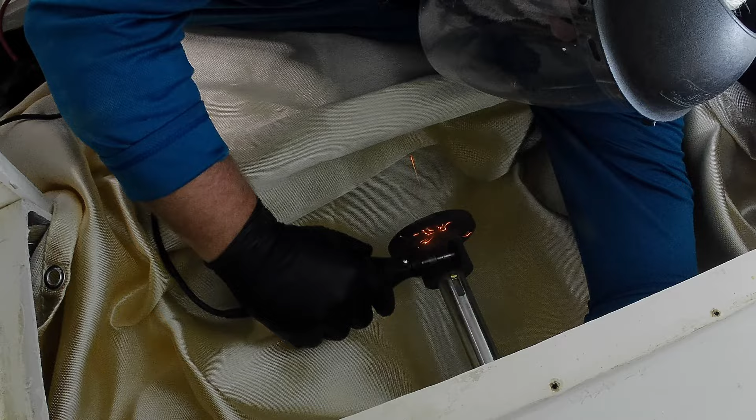I'm gonna cut down right into the coupling right there at the key so I don't touch the shaft. And once I get close enough, hopefully hit it with a cold chisel, it'll open this thing up and we'll be able to slide it off of the shaft. So why am I doing this?

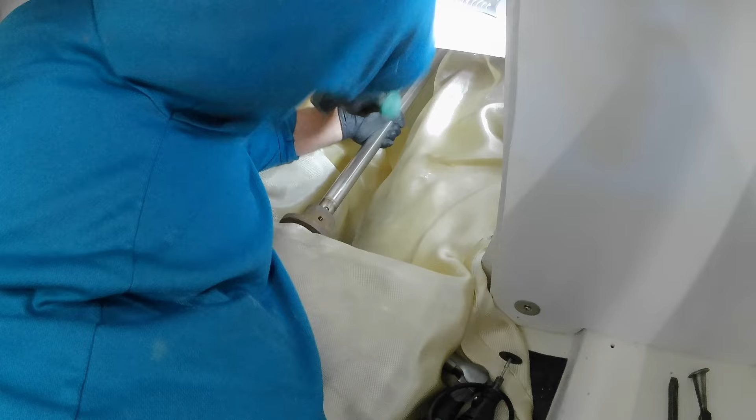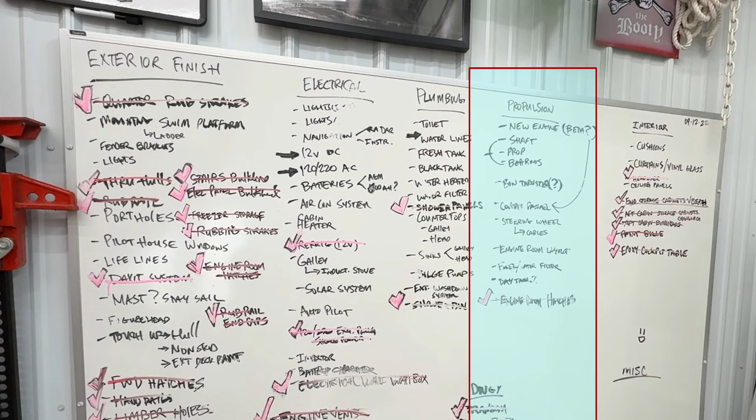For the past several months, I've been working on planning and working through the various issues related to putting in the electrical system in the pocket trawler. Now I'm going to set that aside. There's a couple things I need to start thinking about insofar as putting in the new diesel engine into the boat. In a previous episode, I talked about my choice of a Beta Marine 43 diesel engine. That'll be what I use to repower the Ep125.

Repowering is a term that I use to refer to any work that has to go on the engine and the engine room of any boat that I'm working on. The salty dogs will tell you that in order to repower a boat, well, you have to actually replace the engine or put in a new engine. But I don't really think that's applicable.

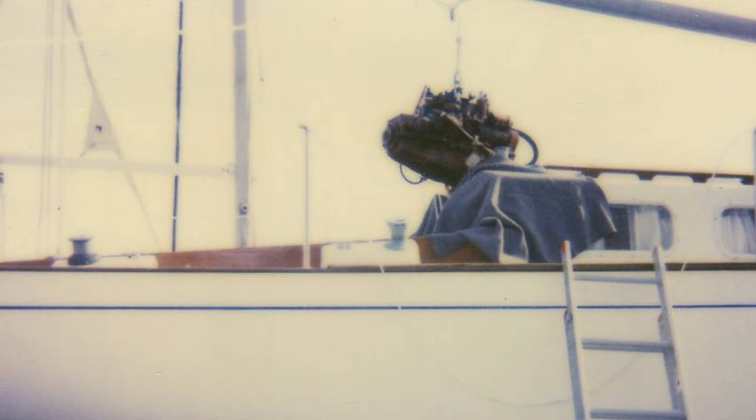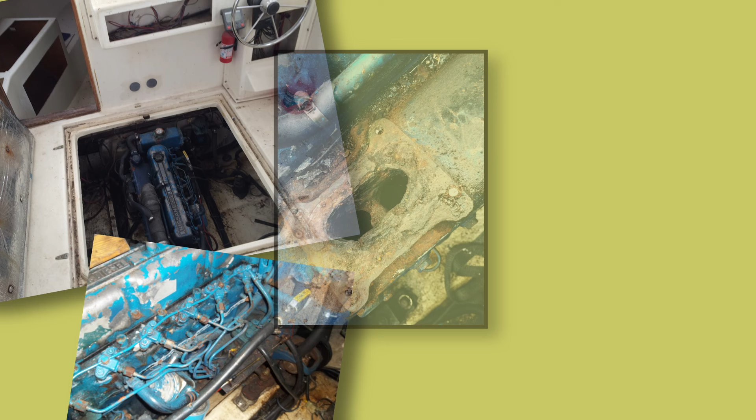If you think about it, any time that you pull out an engine, maybe to rebuild it or to swap it out with something else, or even to update the systems and components that are inside your engine compartment, as long as you're taking that engine out and you're putting something else back in, well, you're probably doing some sort of a repower. You might be refitting or rebuilding or restoring what's already there, or in my case, putting in something completely new with all new systems. This is what we call a repowering.

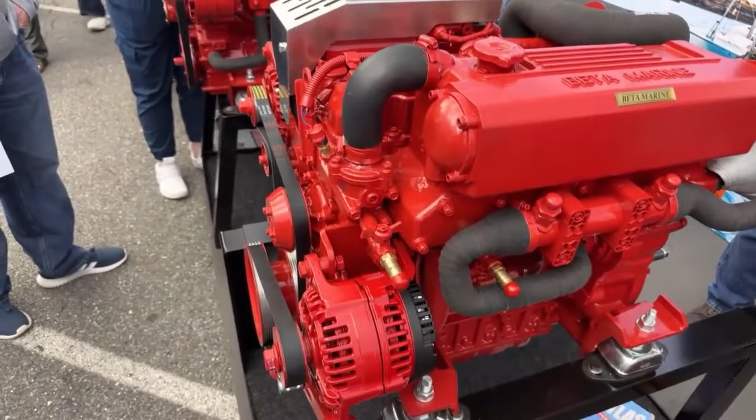This episode is going to be all about the first steps in beginning that repower process. What comes first? How do you even get a project like this started? One of the first steps in any repower is figuring out, well, what's going to fit inside the engine room? How much horsepower do you need so that it matches the boat and the performance that you want to get out of it? And later on, more importantly, how is the engine going to align to the shaft and the other components that are already in place?

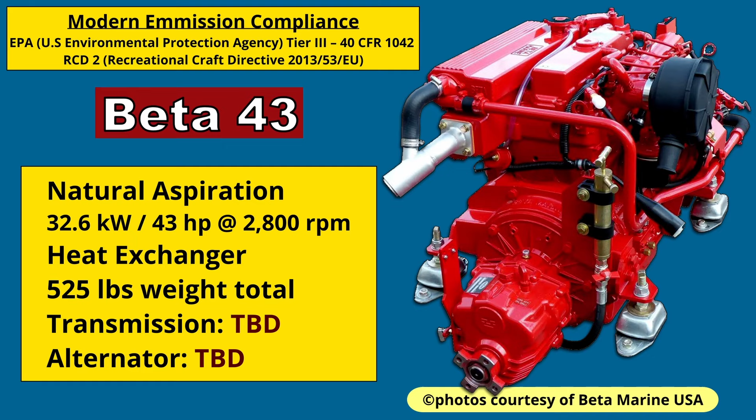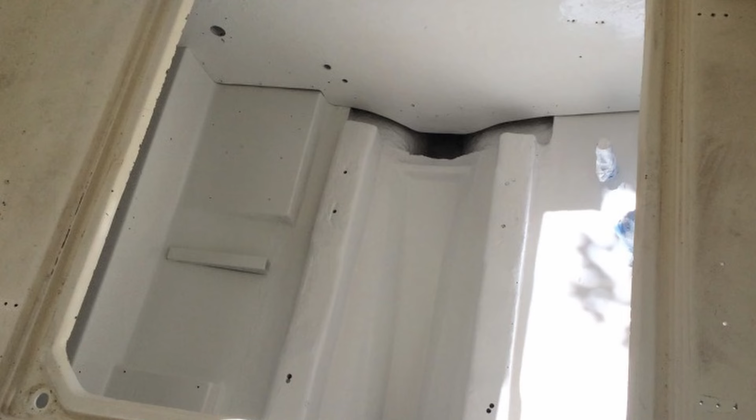So I've decided on the Beta 43, and I guess my next question is, how do we get started? What's the first step to get this thing installed? Yeah, so once we've chosen a model and once we figured out the best fit for your application, then we just need to make sure what your engine bed looks like. If you really think of it from a very simplistic standpoint, our engine is really only going to touch your boat in 5 points. You got your shaft coupling, which normally isn't going to change, so that location would be a good reference point. And then you've obviously got the 4 engine mounts that will attach to your stringers.

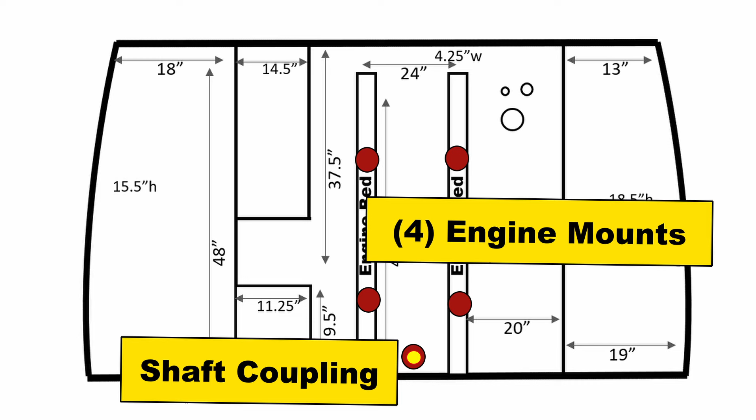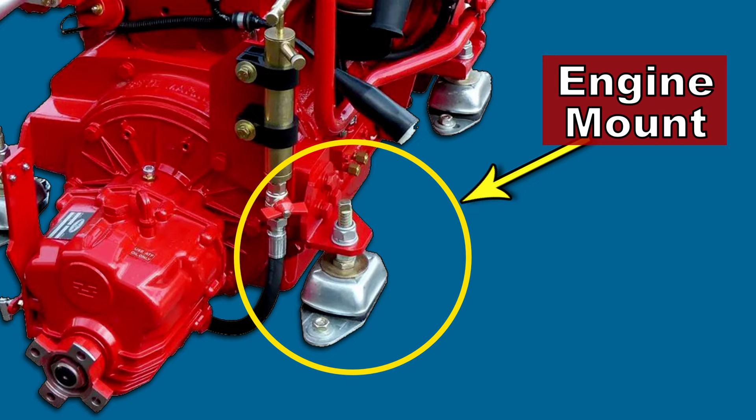So really, once we know the reference between the shaft coupling and the engine beds, that will give us an idea of, we have a variety of off-the-shelf mounts, and in some cases we can do custom mounts if necessary. All right, thanks so much, Keith. I appreciate it. I'll get back to you with some of the measurements, and we'll see where to go from there. Sounds good.

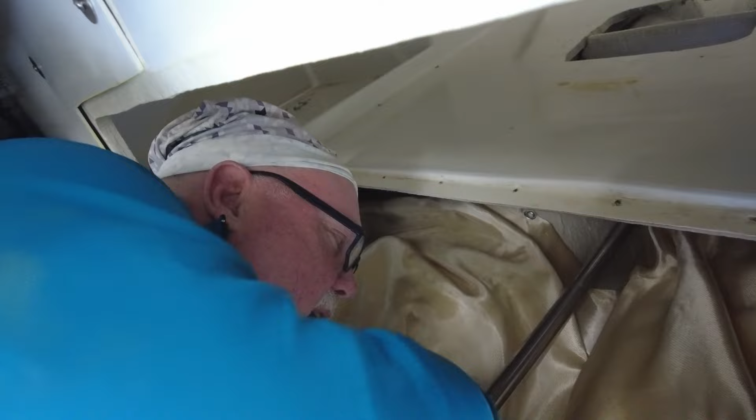I feel like I spend a good portion of my life with this boat upside down, crammed into tiny spaces. I'm down in the engine hold here, and I'm going to be working on getting the coupler off of the engine shaft. Let me see if I can show you this here. Let me get a pointer here. All right, take a look. This is the shaft, right? It comes from the stern of the boat, comes up here. This is a coupling, it's on here. Can you see that? It's a coupling.

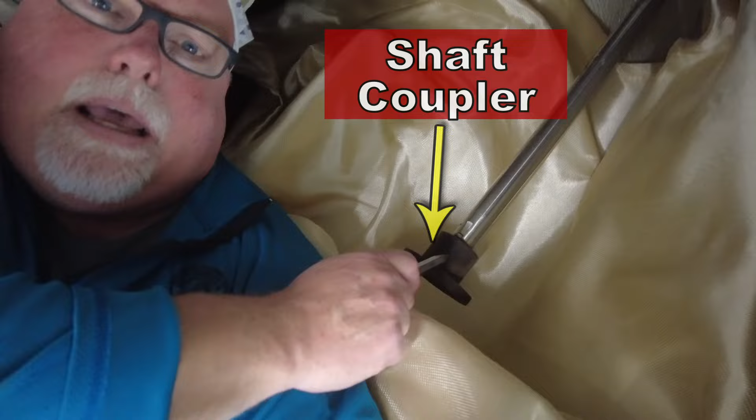And what I'm gonna do is I'm gonna cut this very, very carefully right along here, right where the key is. There's a key that goes inside there, and that's what kind of locks it in place. Well, I'm going to cut down right into the coupling right there at the key so I don't touch the shaft. And once I get close enough, hopefully hit it with a cold chisel, it'll open this thing up. We'll be able to slide it off of the shaft. So why am I doing this? I can't take the measurements I need to take.

I can't extrapolate out where the shaft is going to be relative to the engine beds until I get this coupling off of here. Then I'll be able to lay something against the shaft, kind of extrapolate out where it goes. That'll tell me how much has to come off of the engine bed. So before I get anywhere down the road, I've got to get this coupling off.

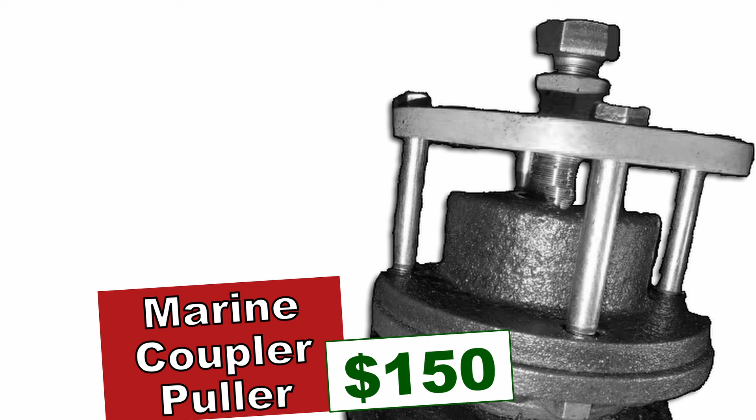Trust me, I debated trying to use a tool to get this off. I broke my gear puller already trying to pull this off of here. It didn't work. There is a special tool that you use for this. It's called like a flange pulling tool. But I don't have one, and the one they make for marine applications is $150. You got to order it from a shop, and I don't have that.

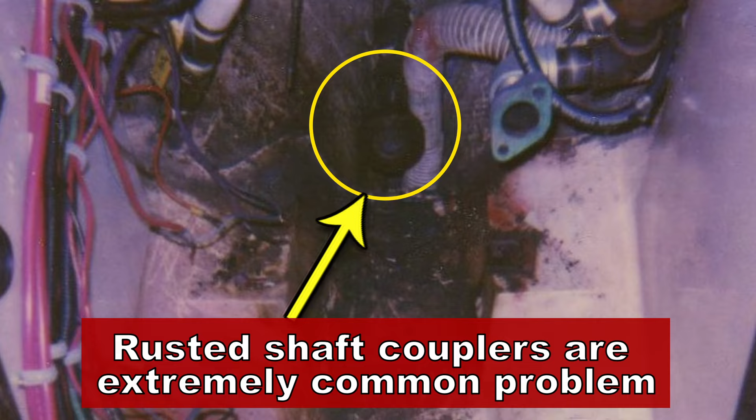And to be honest with you, the last time I did this type of project, when I was doing some of the work on my classic Alberg 30 sailboat, well, I cut the flange off that shaft also, because from my experience, once they get rusted like this, it's virtually almost impossible to get them off of there, no matter how much heat you apply, no matter how much penetrating oil you apply, no matter how much you use a puller and work on them, it can be extremely difficult to get them off and take a lot of time and effort. So I'm going to try and cut it off.

And to do that, I've got a handy rotary tool. And this particular one, I'll show you, it's got these special reinforced cutting discs that you use. They're fiberglass reinforced, and hopefully this will work, cutting through here. The key is you got to be very careful not to damage the stainless steel shaft, because this shaft is probably 8 feet long. They're very expensive. It's 1.25 inches in diameter. I'm gonna work on this. We'll see if we can get this off of here.

You can see I've laid down, this material here is actually a welding blanket to kind of catch the sparks that may come off of this as I'm working here. And I'll just kind of take my time, and we'll see what we can accomplish doing this. We'll know right away whether this is gonna work or not.

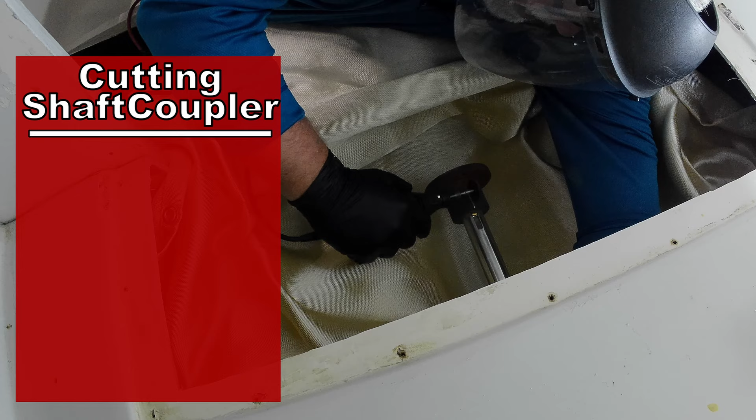If you're doing a boat restoration and your boat has an inboard engine, if you're doing any sort of repower, chances are you're going to end up having to do this sort of project. Sometime you're going to have to get that coupler off. There's a couple things you got to know. The first one might seem kind of obvious. You need to be able to see what you're doing. Often it's really difficult to get inside the engine compartment, get up close, see what's going on. Don't make the mistake of trying to do this at arm's length when you can't see what's happening up close.

Second thing is you really got to take your time. You really got to stop and take a moment to check what you're doing before you continue on. You got to be very cautious when you're doing this. Otherwise, you'll end up ruining your shaft and costing yourself a lot of money and headache. On my classic sailboat, I actually damaged the shaft when I was removing the coupler back in the day. I was lucky that it was only about 3 feet long, and it cost me several hundred dollars to get it replaced. You can only imagine what an 8-foot shaft would cost you.

Just like any kind of metal work, there's going to be a lot of debris that comes off of this while you're trying to cut it. You've got to have PPE to make sure that you don't take a piece of metal in the eye or up your nose. It might seem tempting, but this is not a project for your grinder. The grinder's just too big and it puts off too many sparks and it's just uncontrollable. You really need something like this rotary tool to be able to really control what's going on.

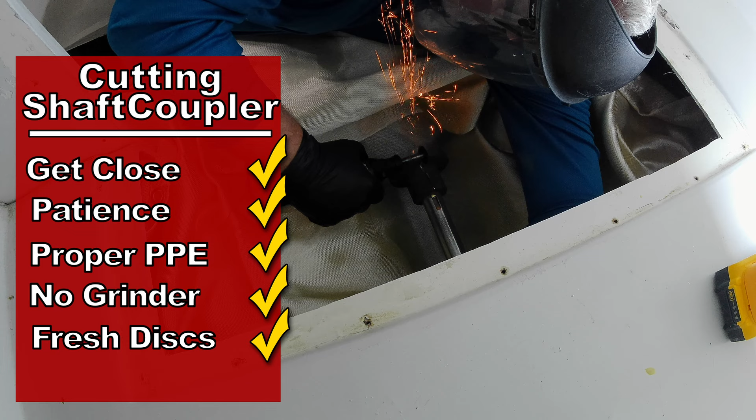Have lots of spare cutting discs available. I think on this project I went through 4 or 5 discs before I finally got everything cut open. Cut only at the keyway, using the key as a sacrificial kind of piece. That way you won't risk cutting down into the shaft.

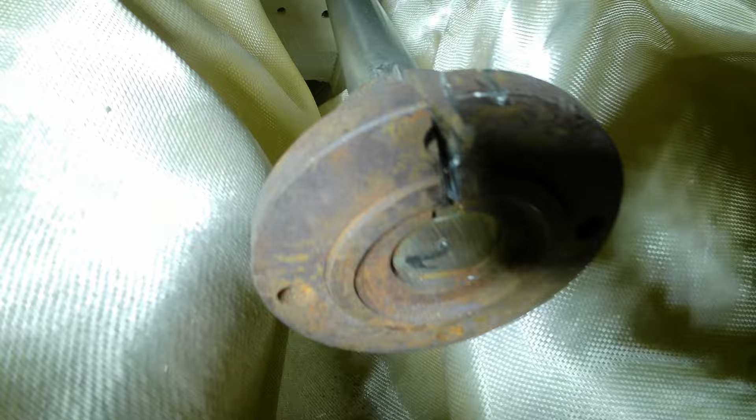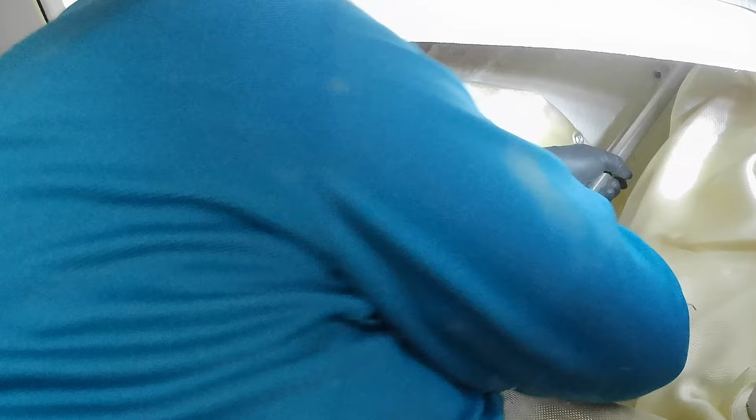Oh yeah, it's working. That clanging noise that you're hearing is the flange bearing that is loose right now. And so I'm kind of holding this with one arm to whack this thing off here. But this stupid metal plate back here is banging around, but this is coming off here.

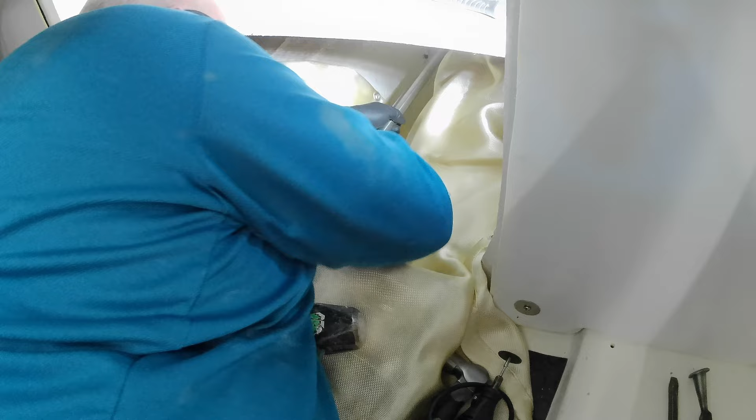Oh yeah! And here we go. It's coming off, see? Look at that. Sweet Mary, I'm loving it. Come on, sweetness. You're coming off. Oh. Come on, you dirty dog. There it goes. Come on, dirty dog.

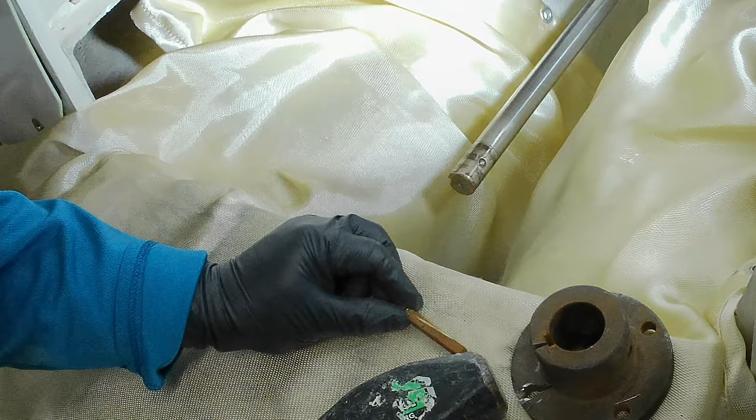No damage. I love it. All right. Sweet Mary Buttercup. Look at that. Oh, that was a monster. We started with the little guy, and then went to the bigger guy, and then we said, "Hey, we're going for the John Henry here. We're gonna take care of this bad boy."

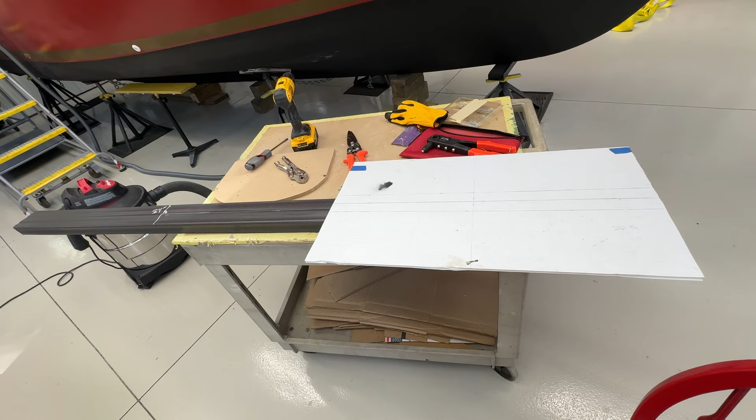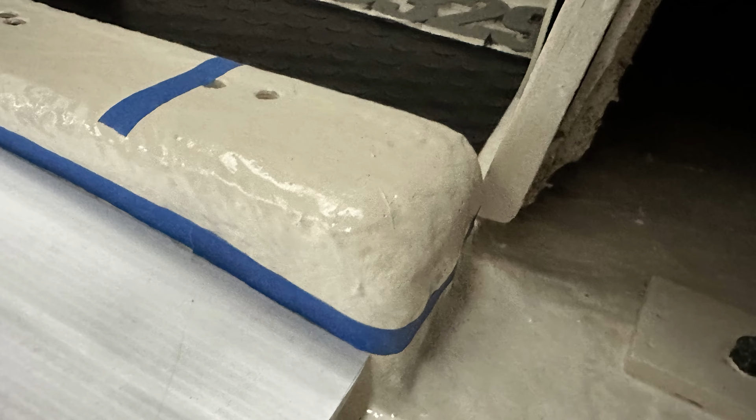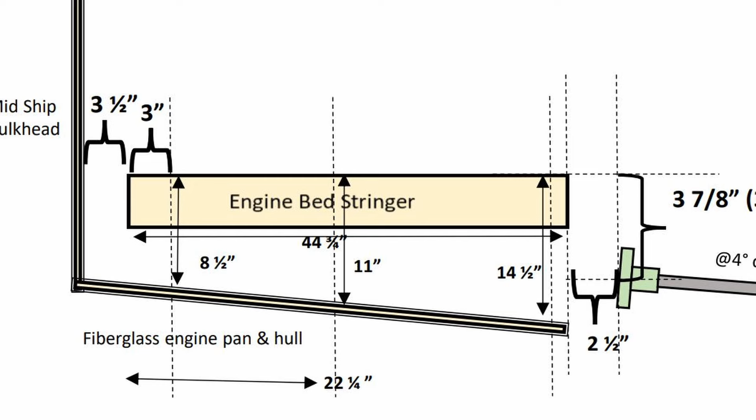Now that the shaft coupler is off the shaft, I'm able to kind of come up with a way to extrapolate out where the shaft might go in relation to the engine bed. I had some scrap plastics and composite materials, and I kind of glued something together that I could take this measurement. The end result is something that kind of looks like this diagram that I sent on to Keith at Beta Marine. So let's remember that the whole point of this is to come up with some very detailed measurements using the end of the shaft as a reference point to where the 4 engine mounts might be located on the engine beds inside the engine room.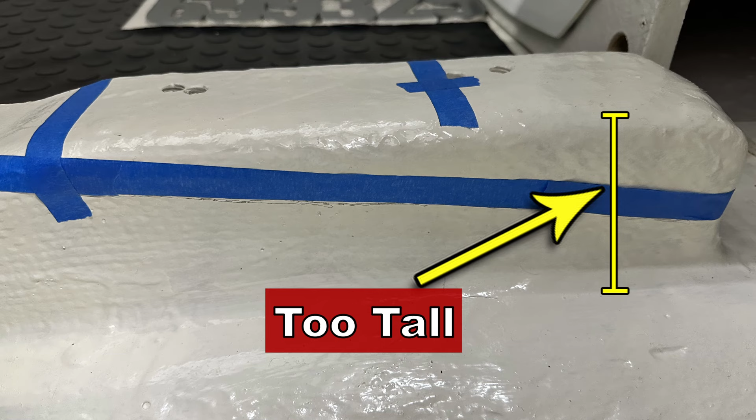Fiberglass stringers, the place where the engine is actually mounted to the hull of the boat. Well, those are too high. They're designed for this other engine. They got to be redesigned in order to fit the new Beta Marine engine. How much do I have to modify them? Well, that all depends on some additional measurements that I've got to make.

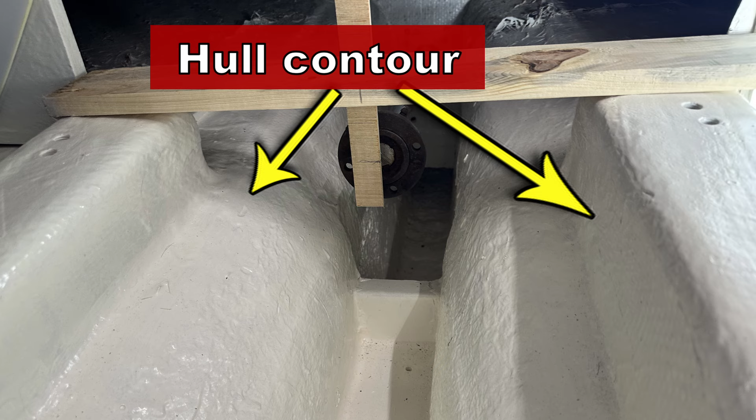The initial measurements reveal some other questions now, such as, will the engine fit inside this kind of tunnel here? The shape of the hull, will the oil pan sump fit inside this space? What about the transmission? Is the transmission going to be able to fit into the contours of the hull here? The transmission that comes standard with the Beta Marine 43 is what's called a PRM 150. It's a manual transmission. The problem is that it's too big to actually fit inside the contours there of the hull. So I got to choose something different.

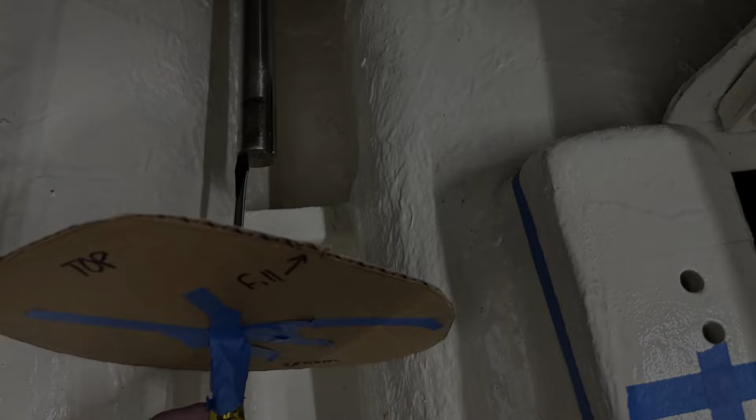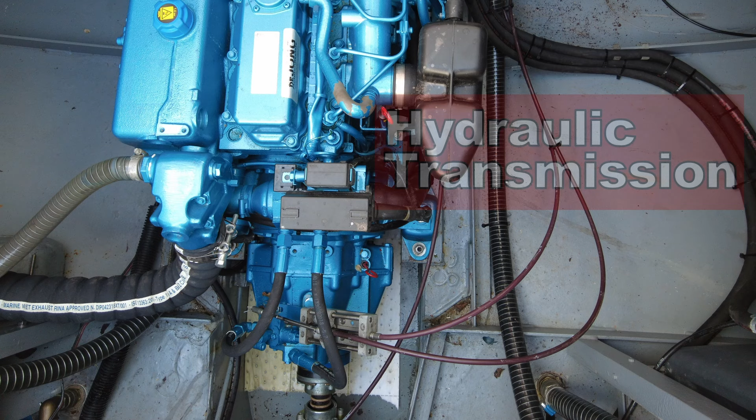But that's okay, because if you remember, when we took our trip to the Netherlands and chartered the steel Dutch Trawler for 2 weeks, I really became quite fond of the hydraulic clutch. This particular engine utilized a hydraulic transmission. It was very smooth. It was something I never really thought about, but I'm definitely going to consider when I do the repower on my Albin 27. If you're doing a repower or you're installing a new engine in your boat project, make sure you do some research so you have an idea of what size you need and what features you really want.

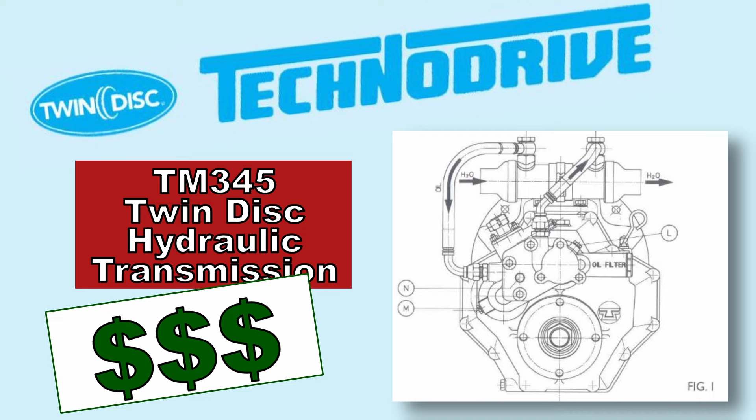I'll be able to marry one with the Beta 43. It's called a Twin Disc Technodrive TM345. This transmission comes from an Italian company. It's very high quality. Unfortunately, it's also very expensive, but I think it's really going to be a nice feature to have on this engine. And the best part about it is that I think it's going to fit inside the hull contours there. It shouldn't be a problem.

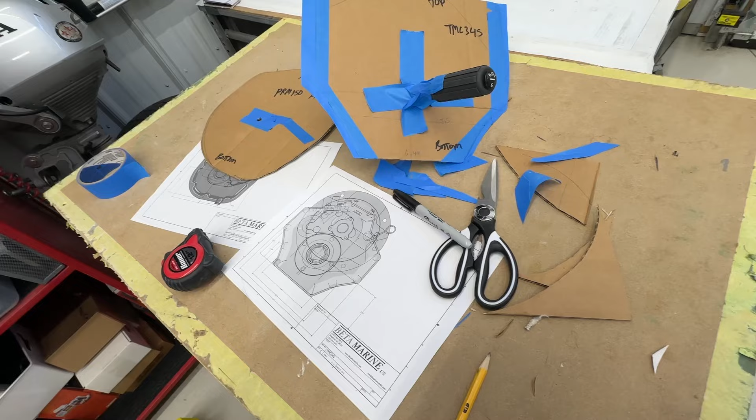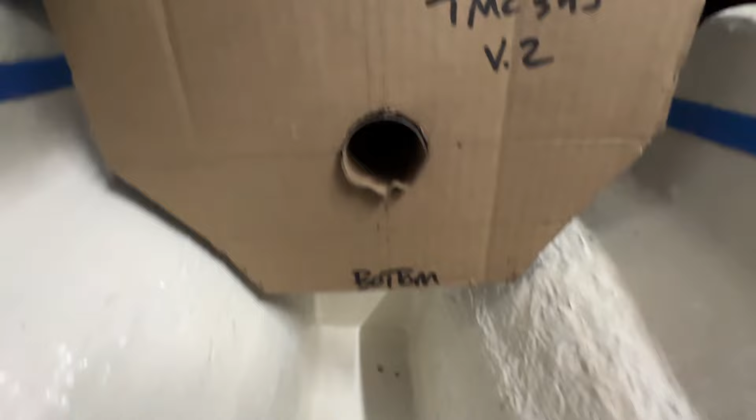Just to be sure, I've got to make another cardboard pattern and mock this thing up. Using an old paper towel tube and some cardboard, I'm able to kind of get an idea of what a cross-section of this transmission would look like at its widest point, make sure that it fits inside the hull cavity here. This is a very rudimentary way of kind of doing this, but I think it looks pretty good.

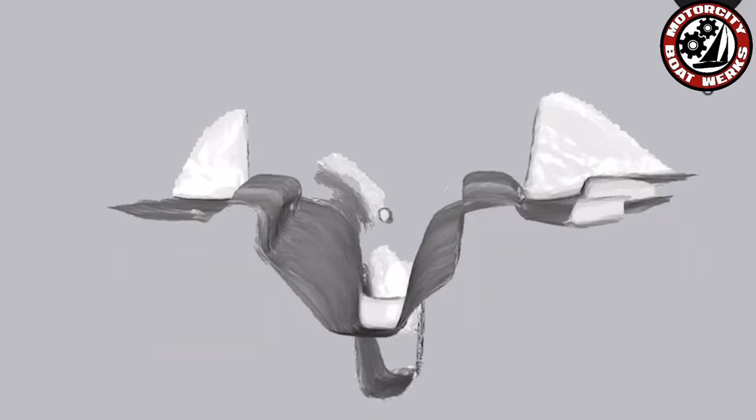All this work brings us to the final point, which is how is the engine going to be mounted to the engine beds? Do the engine beds need to be modified in any way in order to get a proper angle where the engine meets the shaft and all that? Well, this is a question for another episode. And I also want to discuss this new idea that I had about using some modern technology to try and make my life a little bit easier in my amateur boat building.

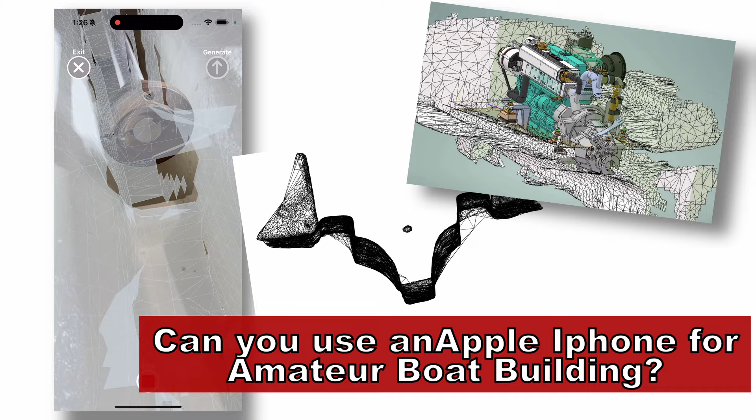In a future episode, I'm going to talk about a technique for using the LiDAR scanner inside your iPhone and using that scanned data, importing it into CAD software so you can get a virtual rendering of what, say, an engine might look like inside your engine bed. How do you actually do it? What's the software you use? What are the steps that you actually have to go through to make this happen? We'll talk about all that in a future episode.